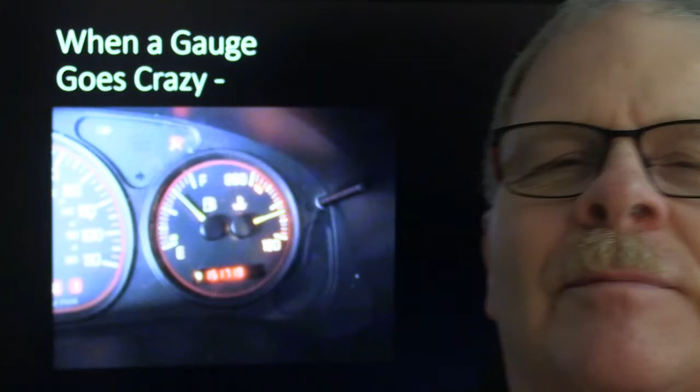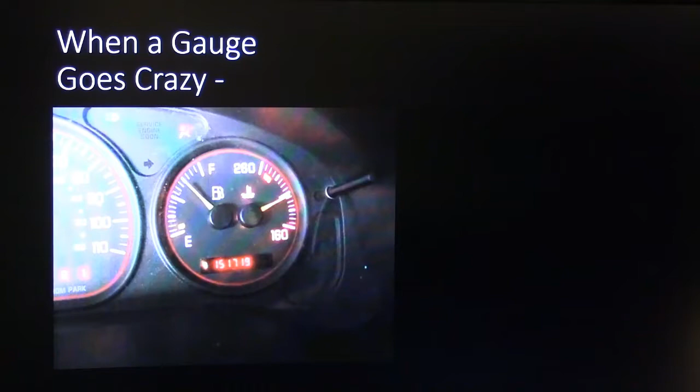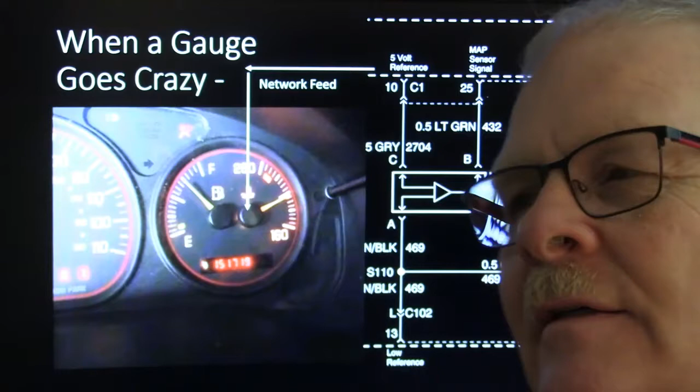Now, this thing right here, tracking this through the Motor Logic to figure out exactly how the signal makes it to that temperature gauge on the instrument cluster, it'll typically be a class 2 signal line on these GM vehicles. The engine coolant temperature sensor is going to be networked over to the instrument cluster typically. Sometimes I think it goes through the body computer or something. I lose track of all that. Whenever you're fooling with one of those, you've got to focus on that particular vehicle and its schematic.

This particular one though, we replaced the engine coolant temperature sensor on the engine and it took care of it. It surprised me that with the readings moving around like they were, it wasn't causing issues with idle quality and other kinds of things. But we put an engine coolant temperature sensor on it and it settled that gauge right on down.

Now on some of your General Motors pickup trucks, between like 2005 and 2014 or whatever, you get those little kits, you can even order them off Amazon, where you replace the little stepper motors that drive those needles, and that is absolutely a fun repair. Doesn't cost a lot to buy the stuff to do it. You have to have a little bit of understanding about it. There's all kinds of YouTube videos where somebody will show you how they did it.

But you have to be something of a hand with a soldering iron, or you can get in trouble. Sometimes you can get different color instrument cluster lights to put in those things. It's cool as all get out, and this is really kind of fun. But this wasn't a problem with the cluster as much as it was with the sensor that was actually at the source of it. Now, this is a little story I wanted to talk about here.

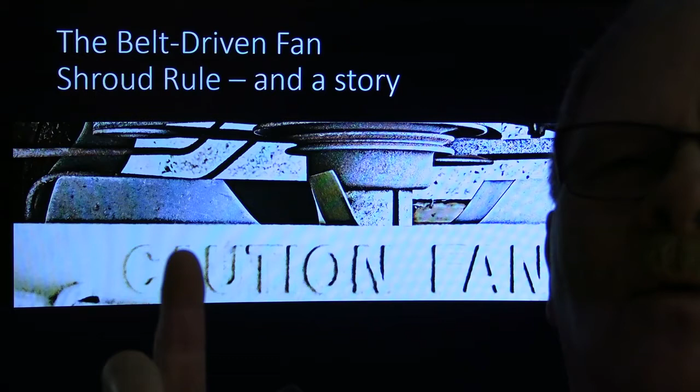You see how that fan is? You see where the fan is split in the middle right there? Let me back up and tell you a little bit about this. There was a late 80s Ranger that belonged to an airline pilot, and this was a long time after that Ranger was new, but he'd driven it for years. He didn't want a really nice vehicle parked at the airport while he was flying his plane, and so he got this old Ranger and he would drive it.

It had a V6 in it, and I can't remember if it was a 3 liter or 4 liter, or what year. Well, it would have been a 2.9, not a 3 liter, in that year model Ranger, because the 2.9s were what was coming in those Rangers back in the 80s. The 2.9 is the same basic engine as the 4.0 overhead valve. The 3 liter is a different engine from the 2.9, and then there was the 2.8 with the carburetors back before they put fuel injection on those Rangers.

But the point is, this one, as I remember, had a 2.9 in it, and it was trying to overheat. We did all kinds of stuff trying to figure out what was making it overheat. We actually measured the temperature at each one of the expansion plugs on the end of the cylinder head to see where the heat was starting to build up. We did water pump stuff, circulation, anything you could possibly imagine. The cooling system was clean, but it kept trying to overheat. And finally, the guy said, is it possible that we could put a bigger radiator in?

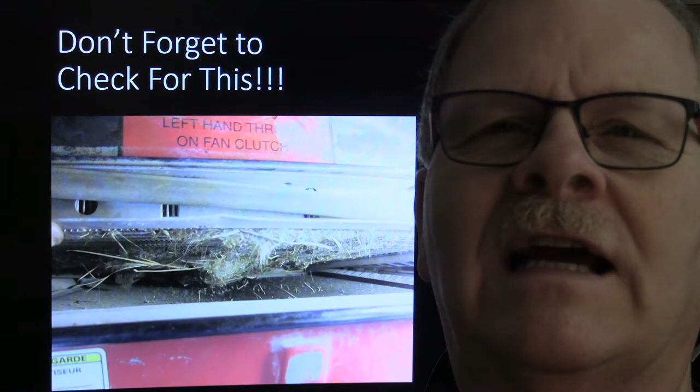All right, don't forget this when you're looking at overheating issues. It's really smart, and I've mentioned this before. You cannot see this unless you take the radiator loose and move it back away from the AC condenser. That stuff will go right through the AC condenser, and not a bit of it will stop there; it gets stopped by the radiator and clogs up in between. I don't know how many times on these farmers' trucks around here I've had one overheating, and I've just externally washed the radiator after cleaning all this trash out and had it cool right on down, just like it was supposed to.

It's amazing how all of that stuff can make it all the way through that AC condenser, and it'll fool you looking at the AC condenser into thinking there's nothing in the radiator. But boy, if you pull that thing back and look down at that radiator, or maybe get your borescope to look down in there, you'll be surprised sometimes how much of that crud is there.

Now, you've also got to think about where the vehicle has been and how they've used it, and if they've done a lot of driving through the fields on it, like the farmers do, chasing their cows and all, you're going to wind up with a situation like that.

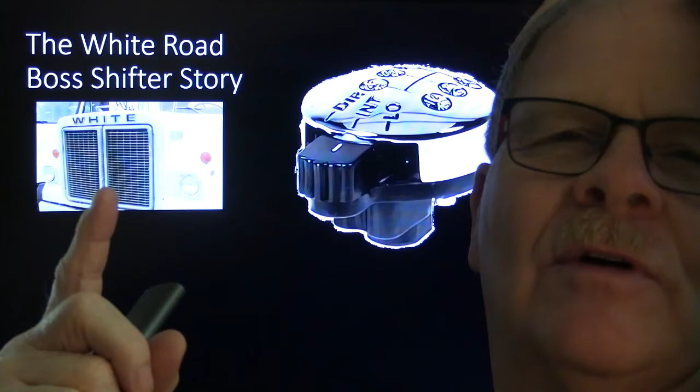All right, this right here was a little White Road Boss story that I had. I mentioned it one time before, but we had a couple of these White Road Boss 2.5 ton, deuce and a half semis down there when I was working in Texas. I was probably 21, 22 years old at the time, but I was something of a shop foreman. I had a purchase order book and that kind of thing.

But all of these older guys were always telling me, you can't do this, you can't do that. Some of these guys were just truck drivers, some were electricians, some were welders and all that kind of stuff. But because I was younger than every one of them, they always felt like they were a little bit wiser. And all they had to do to get me to try to do something was say, you can't do this.

One time, my immediate supervisor was in charge of the cranes and the pipe loaders and the forklifts and the cars and the trucks, and I basically handled the lighter work on the pipe loaders, if you could say there was any light work on them, and also the forklifts and the cars and the trucks. I didn't do any work on the cranes because I didn't like cranes. I've worked on cranes, but I didn't care nothing about fooling with cranes.

This CY60 forklift that we had, an old Clark CY60, had the power steering pump built on the back end of the generator. This one's old enough to have an actual generator, not an alternator. And the seals in that power steering pump kept leaking. Even when we put seals in there, I don't know if the shaft had a little mark on it or was brinelled or something. But oil would get into the generator, and the generator would stop putting out because the oil would foul the brushes.

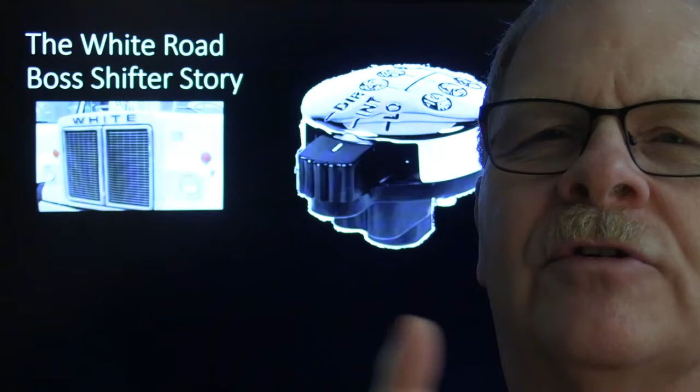Well, anyway, some of these smart aleck truck drivers had a shifter kind of like this with these air valves on it. They got this big, fancy Hurst shifter, a big, ugly, stupid looking thing, and it still had the air valves mounted on it some kind of way, and they wanted to put that on there. But rather than just being right on top of the shift rod, which had a 5/8 thread up in here, they put that big old thing on there, and with all that jerking around, they broke that threaded rod off the top of that shifter.

And so the truck came in and they said, well, this rod broke off the shifter. What are we going to do? I was sitting up in the truck looking at it, and one of them says, you're going to have to replace that shifter. And I says, oh, well, I don't know.

I said, I might be able to fix this one here. They said, there's no way you can fix that shifter there. The threaded part broke off of it. And it was like a 3/4 inch or slightly bigger shift rod, and it had been machined down to that 5/8 U.S. standard coarse thread.

And so I said, what if I was to file this thing off flat where it broke, center punch it, and make a little pilot hole, and go down in there with a drill, and then tap some 5/8 threads in there, and use a piece of threaded rod long enough to where I could actually replace the threaded part on top, so the shifter would screw right back onto it.

They says, you're still going to have to pull the shifter off and do that with the drill press. There's no way you're going to be able to do it in the truck. Well, I was going to show those people, I didn't have anything to lose whatsoever. So I got up in the seat with that 1/2 inch drill, and I center punched that thing really good and solid, and I wrapped my leg around it to hold it still, and I held that big old 1/2 inch drill and drilled down in that thing.

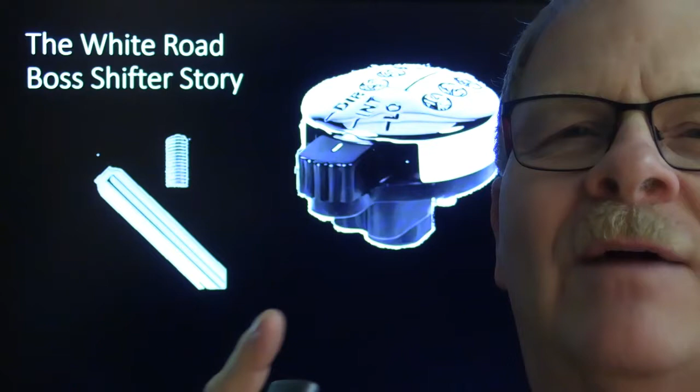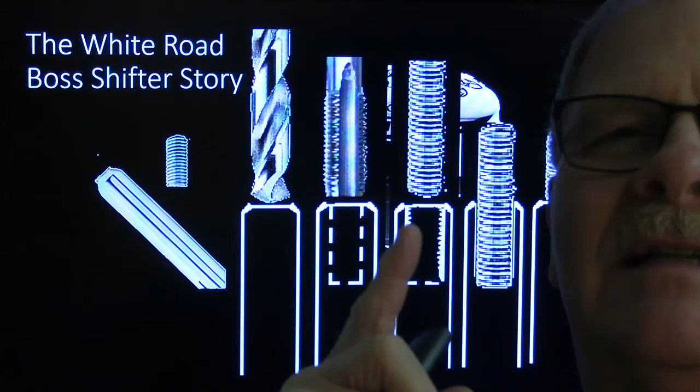And that's how it was broke off like that. And I drilled down in there, and I made that little place right there. And then I got the tap, and I tapped it. I drilled down in there, and then I tapped it with this tap. And then I screwed that piece down in there, and I made that shifter look just like that again. And I fixed that thing.

That truck was back on the road in 25 minutes. They couldn't believe it. They felt like we've got to order parts and all this kind of stuff. And here's the other thing. If you're fixing something in a situation so that it doesn't matter, you know what I'm saying? If it doesn't matter, if you got nothing to lose, that's the point.

One time on one of the big trucks we had a Loadstar 1850 gas burner, and you know how the ring gear on these big manual transmission vehicles is basically you put it on the flywheel kind of like a blacksmith used to put the tire on a wagon wheel. You heat it up and you let it settle into place. In other words, you're going to have the flywheel laying flat. You're going to lay the ring gear up there, and you keep heating it with a torch until it gets big enough to where it drops into place, and then you let it cool off and it grabs the flywheel.

Well, this one here, for some strange reason, had decided to let go of the flywheel, and the starter would spin the ring gear on the flywheel. And so my supervisor said, we're going to have to pull that transmission out of there. And I'd pulled the transmission out a bunch of times, and I wasn't afraid to do that. But I told him, we don't have to pull the transmission out. All we have to do is I can get up under there with a welding machine, and I can basically put about maybe a 1/2 inch weld in about 5 or 6 places around that thing, and it will work just as well.

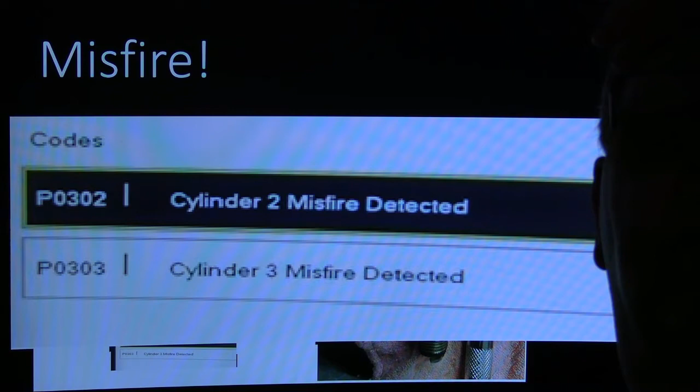Cylinder number 2 misfire detected on this particular one here. This was an Asian car. It may have been a Nissan Maxima. I'm not sure, I absolutely cannot remember. But I got the Pico scope that we had over there at the time, and I went ahead and got this screwball scope pattern. See how crazy that thing looks.

And whenever I was using a plain old scope, back in the CRT scope days, if I saw one like that, I always assumed there was something bad with the spark plug going on. And so we'll pull the plug out. Look at that. We had that thing scorched all the way down the side. When the plugs get where there's too much resistance, that spark's going to look for somewhere else to go. And this one here arced down the side of the plug.

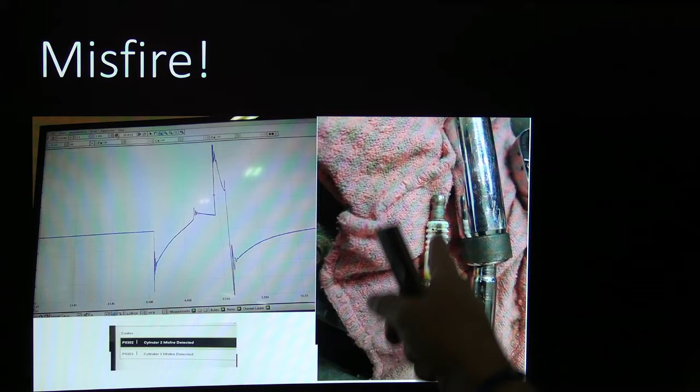And so we managed to take care of that. But there's that Pico scope pattern that I got right there. That was a pretty cool little picture I pulled out of my archives.

You know, if you pulled in there and told them you wanted to buy the truck, they'd just say, no, it ain't for sale. It was my daddy's truck, and I'm going to keep it until it rots or something like that. But I'm not in the mood to do any sort of rebuilding on trucks anyway.

We're basically going to be teaching them how to work on the cars of today. Late 60s vehicles are interesting to work on, but they're not going to benefit a whole lot from that. I like for the students to have something they can learn more from than working on something that's old. Later on, we did do a little bit of work on some older cars, but I wasn't going to get that started because you can fill your whole lot up with people wanting old cars worked on.

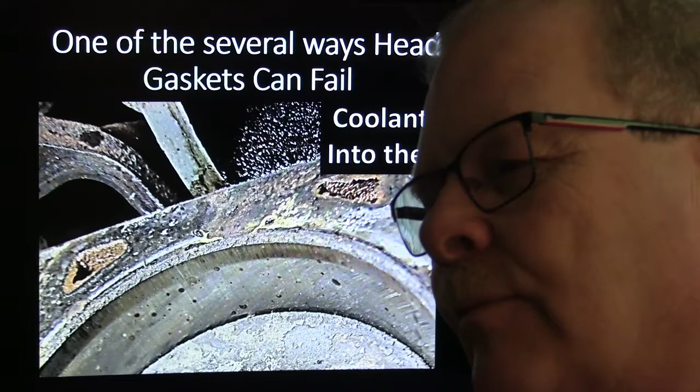Now this right here is one of the several ways head gaskets can fail. This was on my Jeep Cherokee. Whenever I'd drive it 30 miles from where I was teaching, I'd stop here and go to Winn-Dixie to get some bananas, and when I'd come out and crank it up, it would go bup, bup, bup, bup, and flash a check engine light, and then it would clear up.

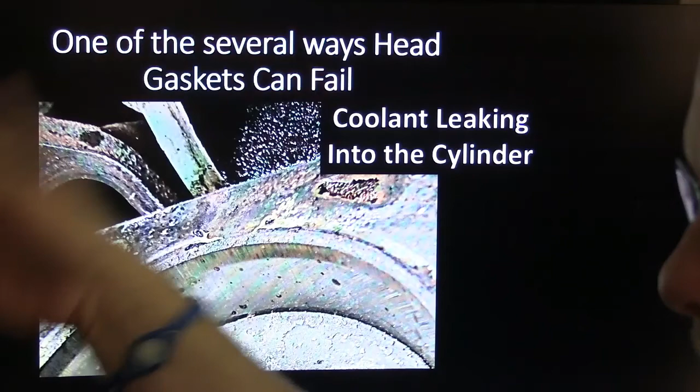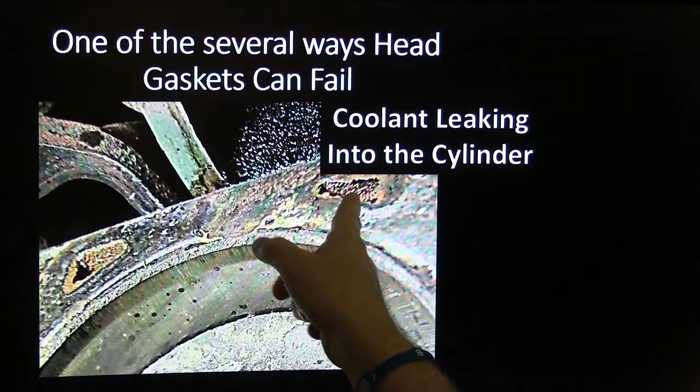And it turned out that cylinder number 3, which is fairly common on those 4-liter Jeeps, was getting coolant. This crusty stuff you see here is coolant that has crusted up and dried on top of the piston. It was basically weeping its way from this coolant passage past the fire ring into the cylinder. Now, again, there was no combustion getting into the coolant, but there was coolant getting into here. And that is more common than you know.

When people talk about blown head gaskets, they say, well, if I got a blown head gasket, I'll have water in the oil. That is so rare. I don't even know on most of them how that could even happen. But in this particular case, that one there caused a misfire. And you know what I told you I do with a misfire?

When I've got a misfire like that, I crank it up, and while it's still skipping, I shut it off. I pull all the plugs out, and if I see one of them that's steaming, I know that there's coolant getting into that cylinder. Or if I see one that's got crusty green deposits on it, the same color as dried antifreeze would be.

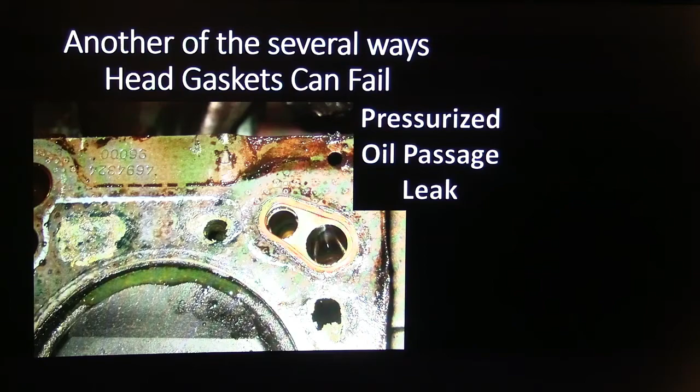All right, here's another way it can leak, a pressurized oil passage. All of the engines that have overhead camshafts in the head have to have pressurized lube oil going to the cam bearings, and they're going to have a pressurized oil passage going through.

This is on a 98 Dodge Stratus. This particular one, the reason that head gasket had to be replaced was because this thing was leaking a lot of oil right in this area. It was running down the bottom, dripping off the bell housing.

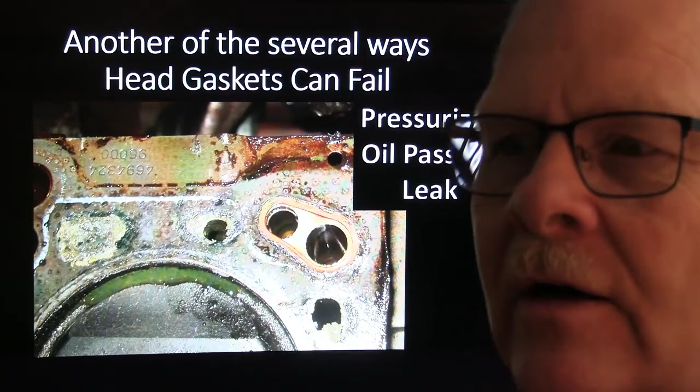They thought at a shop down in Florida somewhere where they took it to that it had a rear main seal because it was dripping off the engine down there at the lowest place where it always will, even if it's leaking above there. We put dye in it and found that. But anyway, this right here was where it was leaking, and that's the oil passage right there.

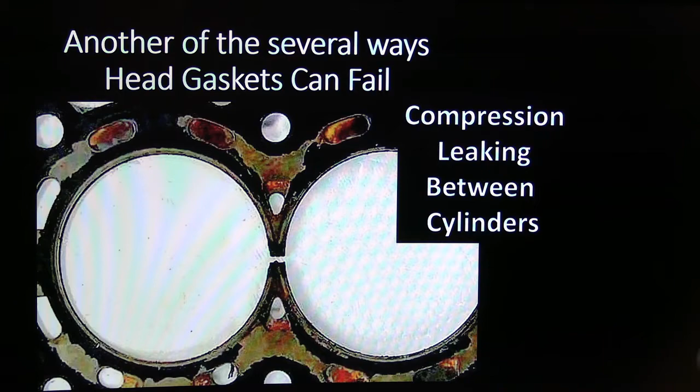Now this one right here is another way it can leak. You can blow between 2 cylinders. You'll have low compression on 2 cylinders. Usually have misfires on 2 cylinders. And you may have some popping going on in the intake or something like that, or in the exhaust. But whenever you measure the compression, you got 2 adjacent cylinders that have low compression.

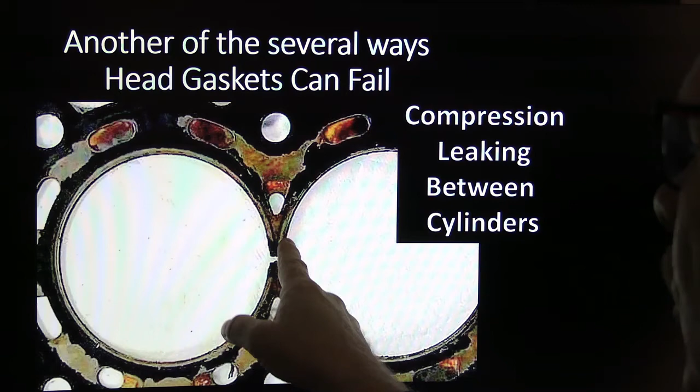You're going to be looking for a situation like this. One fire ring failed, and then it burned through the other one, and all that. The fire ring is the part around that cylinder head gasket that's supposed to contain that combustion whenever it happens. And this right here is when you're getting combustion into the cooling system, and it'll overheat it really, really fast.

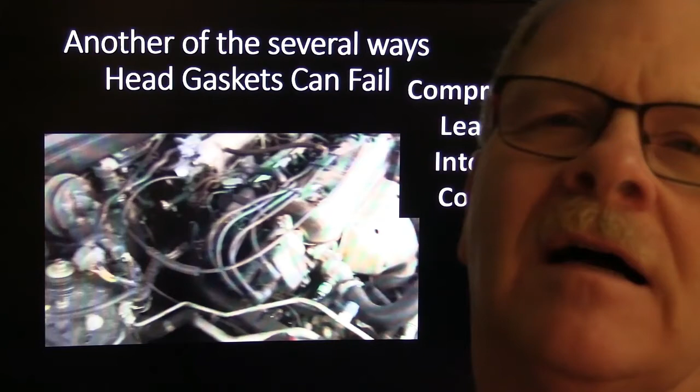I had often told my students that if you suspect a problem like this, that was pretty doggone bad there, the one that you saw puffing. But if you suspect that you may have a problem, let the vehicle sit there until it's completely cold, it's been sitting all night or whatever, and then go out there with the radiator cap on it and fire that thing up. There's a couple of ways you can do this. Fire it up, let it run about 60 to 90 seconds, switch it off.

If you take that cap off and you hear it going when you take the cap off, you know it built pressure in there a lot faster than it should. Because the reason pressure builds in your cooling system anyway is the temperature and the coolant expanding and all that. It shouldn't heat that thing up and build pressure in there within 60 to 90 seconds of running on a cold engine that's been sitting all night.

What some guys like to do is take something like a rubber glove, like a nitrile glove, and either tie wrap it or rubber band it right there around the radiator filler neck. And when you start it up, watch that rubber glove, and if you see it puffing, or if you see it inflating really quick right after you start the engine when it was cold before, or even when it wasn't cold, if you see it beginning to inflate really fast, you'll know that there's combustion going in there.

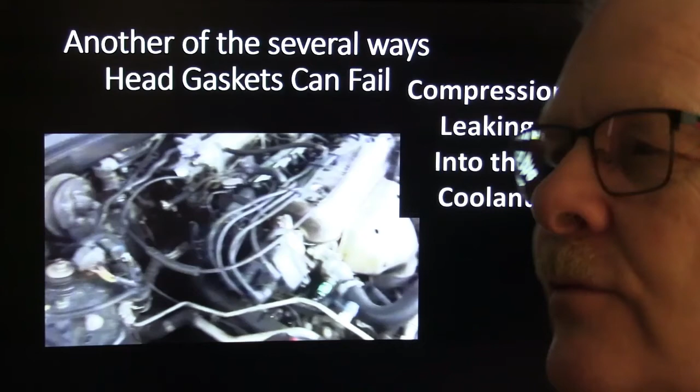There's tools you can buy that you can put this liquid in there and you watch it change color and all that kind of hogwash, or you can get an exhaust gas analyzer and sniff in there and see if you find anything. But anyway, what I always like to do, if I would spin it over like that and I saw it go puff, puff, puff, puff, puff, one puff per cylinder.

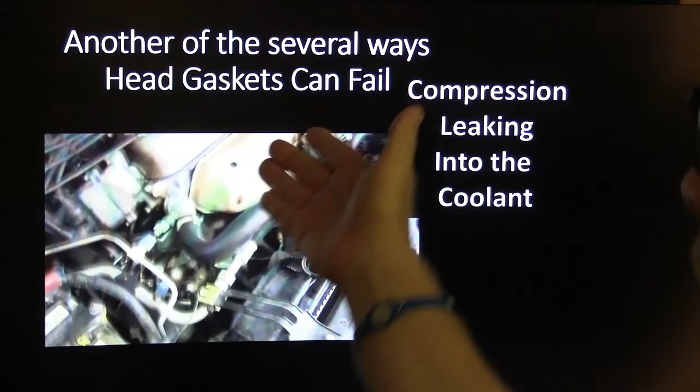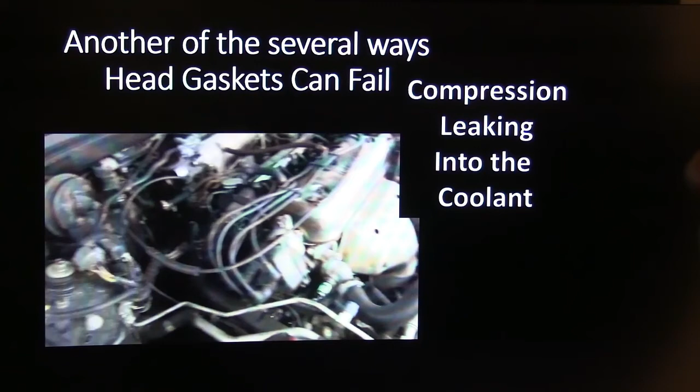Now if you pull the spark plugs one at a time, or pull all but one of them and leave that one in there with it completely full of coolant, you spin it over. If it disturbs the water, you'll know the only one with a spark plug in it is the one that's actually got the breach. Now if you pull that plug out and put it in the next hole and keep working your way down there, you can find which cylinder is causing that before you ever tear it down. Of course, looking at the plug helps too.

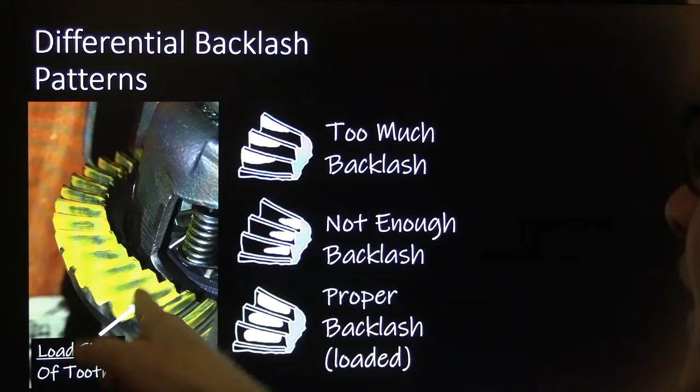This right here is differential backlash patterns. This is the load side of the tooth, and this is what it's supposed to look like. You're going to paint this compound on there, and you're going to turn it through, and you're going to make sure that you're turning it the way so that you'll have good contact on the drive side of the tooth, which is the bellied out side of the tooth, the side that's loaded when you're going forward, okay? This is the load side of the tooth, and this is laying over sideways like these are.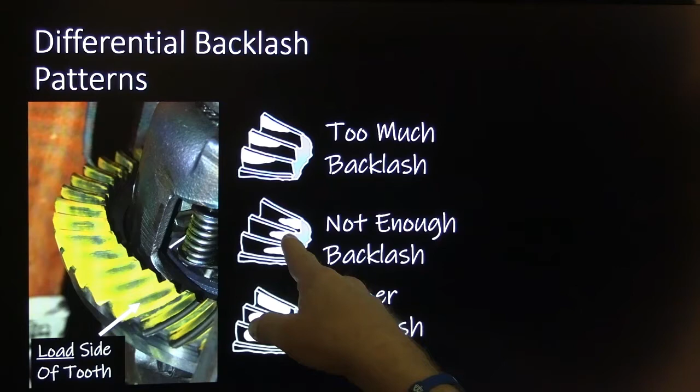Okay, that's the way it's supposed to look if it's set up right. Now if you don't have enough backlash, you're going to see a pattern that's down here like this. If you got too much backlash, you'll see it like that. There's some other ones for pinion depth and this kind of thing. I could have shown you a whole bunch of these patterns. We'll save that for another video.

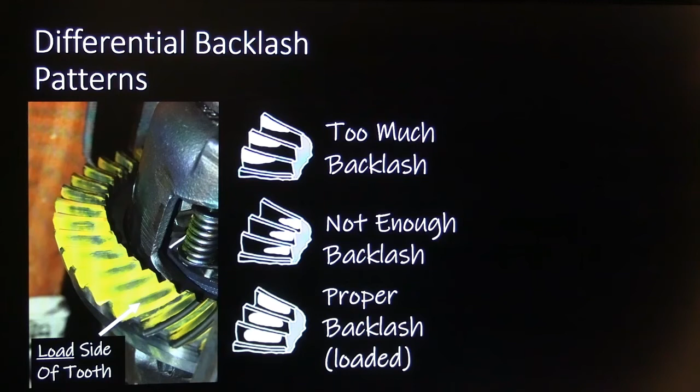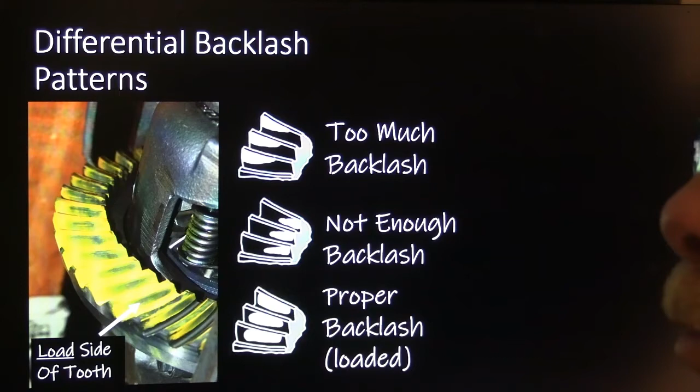This is the proper backlash with the engine heavily loaded. But that's what you're going to see right there. You just paint it basically with some kind of white grease, or maybe just plain old paint, but you got to turn it through if you're using paint so that before the paint gets dry you can see what kind of pattern you had on your gears. And basically if you don't do this, you're going to have singing, whining gears, and if you drive them until it mismatches the gears, they're never going to stop singing and whining.

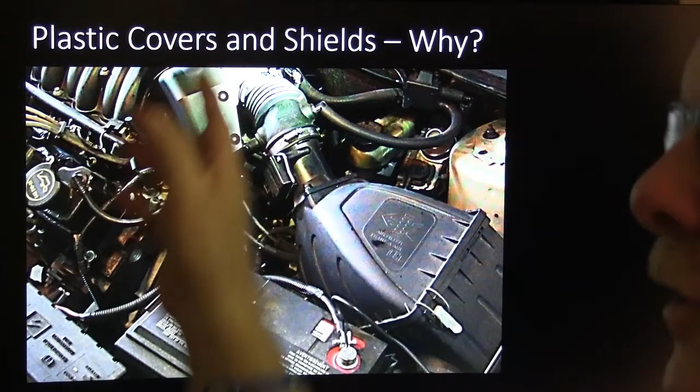Alright, now look at these plastic covers and shields. You got a shield over the throttle. If you're one of these guys like me and it doesn't have electronic throttle body, and you like to pull on that throttle and rev it up, that's annoying because it's hard to get around it without taking it off of there. But they put this cover over there, and then they put a cover on the battery too. Now what the heck is that about?

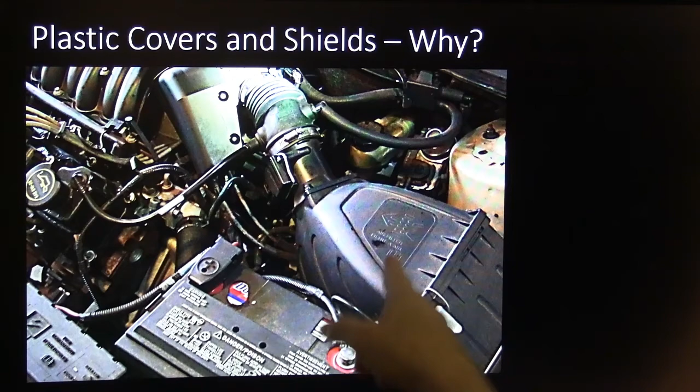Also, you got this breather here. If you see this breather cracked or broke or something like that, don't try to fix it with duct tape. Replace the breather, or you're going to wind up getting a lot of dust and dirt up in here destroying your engine.

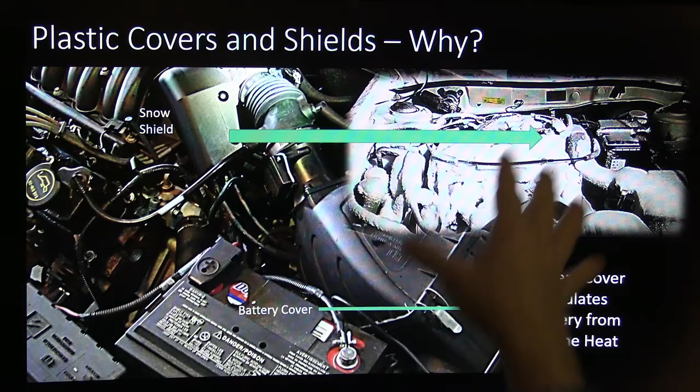Well, this is a snow shield. You would not believe, if you're not from that part of the country, how much snow gets through the grill and under the engine compartment, and if you don't have the snow shield on it, it can hold that throttle open and you can let off the gas and find out you're still driving down the road. PCV system likes to ice up sometimes in places like that. The throttle body sometimes will ice up because of cold moisture coming. That's why a lot of your throttle bodies will have hot water lines circulating through the throttle body to prevent the throttle from sticking open.

The battery cover is to keep the battery from getting quite so hot due to engine heat. Some of the Explorers, whenever they first started building the Ford Explorer, I'm talking about the SUV, not some of the old pickups where they call it Explorer, the SUVs would come in there and we'd have to put battery boxes on them under some sort of a recall program. Part of the problem we were having with the Explorers was that batteries were boiling and making a big mess out of everything.

And so what we would have to do is get those battery covers that they'd send, and we'd put those battery covers on there to prevent the battery from getting too hot and mitigate that boiling electrolyte situation in the battery.

And we had a service manager one time. Some of you guys that are familiar with the Ford thing, they have this OASIS online automotive service information system, and you put your serial number in and it prints out the warranty work that's been done, and any recalls it has on it. And every single ticket that the service writers wrote, they had to run one of these on it and print that out. Recalls and programs are two different things. Programs expire with time and mileage, but recalls are good forever.

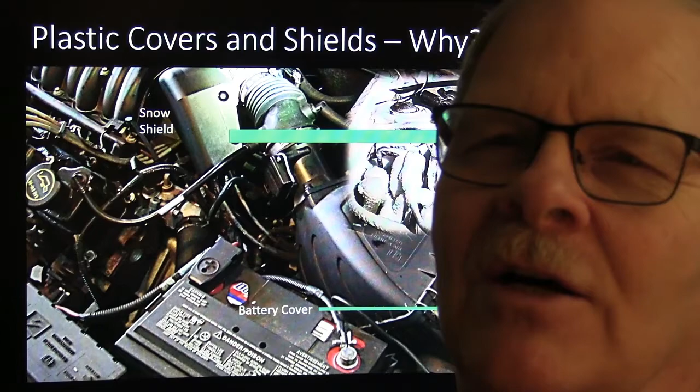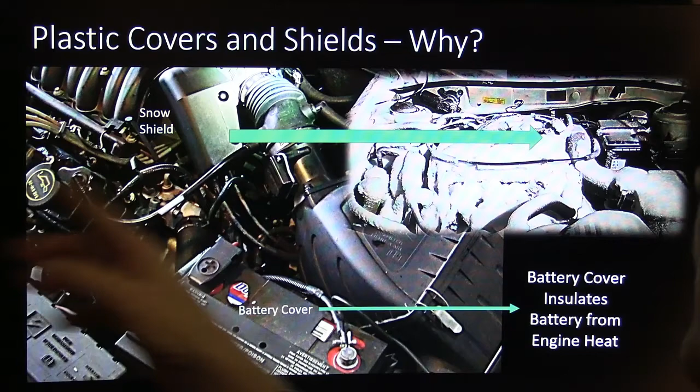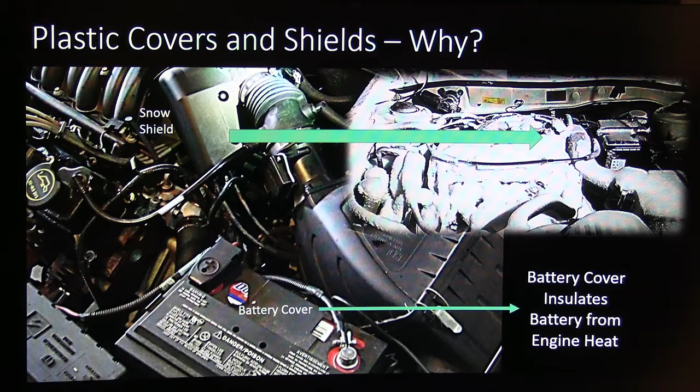Now if you're not going to put it back on there, then you're basically doing something that's going to change it. Imagine this. Imagine you leave it off. They drive it up north. The throttle freezes open, and they crash and burn, and they find out you left the snow shield off. Think about how that's going to play out. Of course, the battery cover needs to be put back on there too. You don't need to leave that off.

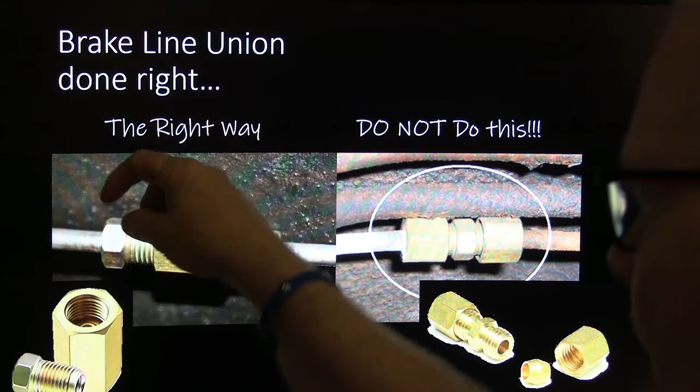Well, the brake line union done right, you'll use one of these, you'll double flare the lines and have the right kind of little nuts here to put it on there. Screw that down in there on both sides. That's the right way to fix a brake line. This is the wrong way to do this. This is a copper tubing union. It's okay for fuel line that doesn't have a lot of pressure on it.

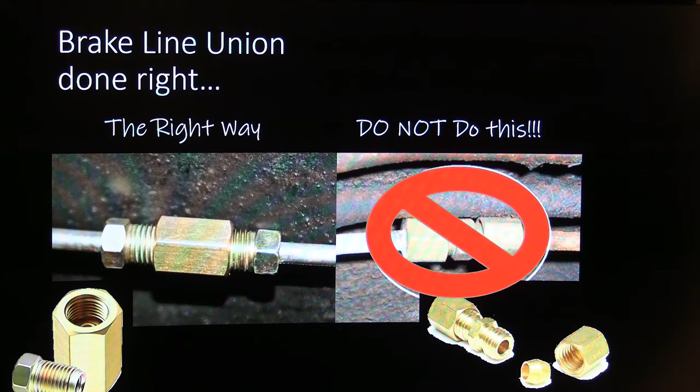These lines are going to have as much as 2,000 pounds of fluid pressure on them, and your brakes totally depend on them things staying there. That's why you need to fix these right. Do not use a copper tubing union on there. You may get away with it a time or two, but sooner or later it's going to bite you. Do not go here. Don't use the copper tubing union with a little ferrule to fix brake lines. As easy as that is, it's a bad idea.

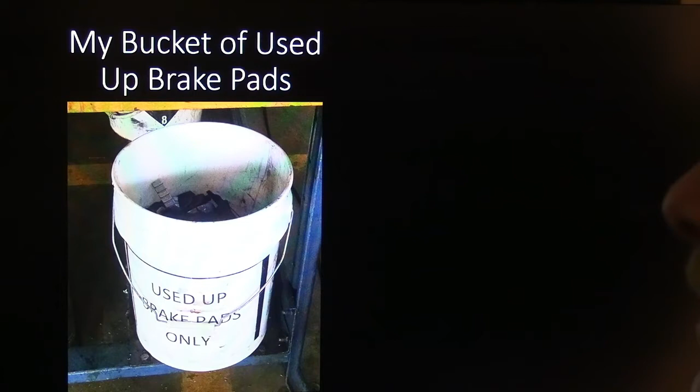I used an old bucket that I put a label on, used up brake pads only, and we would throw brake pads in there. And of course I'd say used up brake pads only. Look here, somebody put some tire weights in there. Whenever you stick them sticky tire weights on there, and then you got to pull them back off when you're trying to get the tire to balance and all. Somebody threw a bunch of those in there. I thought this was like scrap metal.

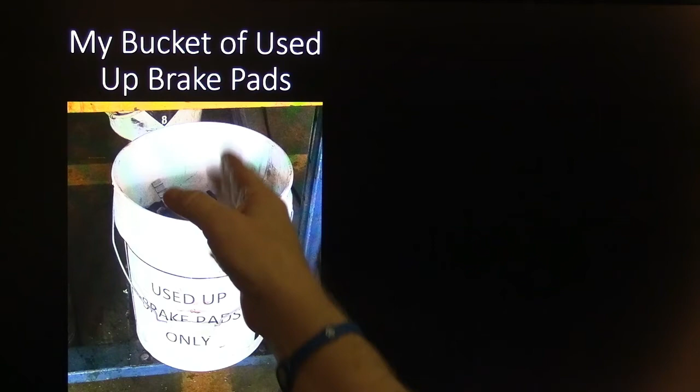And I would actually put these, there was a scrap iron bin over there, and that's where I'd put the brake pads. I didn't just want to throw them in the trash, but that bucket took a while to fill up, but not really all that long if you do a lot of brake jobs.

So it's always a good idea to use fender covers and to keep the thing cleaned up. And some of these vehicles that we used to get in there would be those super shiny Mustangs. And boy, if you put any kind of a little scratch or anything on their paint, some of those people would get apoplectic on you.

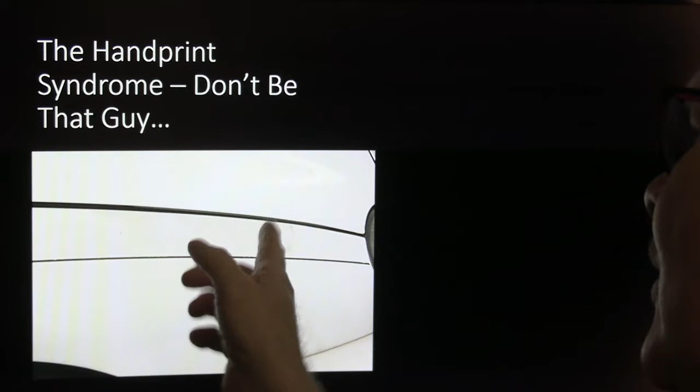But you need to be taking care of that thing and not leave the dirty handprints on there. I took a picture of that because somebody got through with a customer's car, one of the students did, and they left dirty handprints all over it like that.

And I got really tickled at one of these guys that runs a local body shop. He was a piece of work, and kind of loudmouth. Their shop does fairly good body work and all. But I went over one day to talk to him about something. And you know, you can see somebody that's kind of full of themselves like this.

And when I pulled up out there waiting to talk to him, he was out in front, and he was looking at this vehicle he had just finished working on, and he told one of his people that were out there, one of his porters or something, that was supposed to bring the car around and make sure that everything was all right on it.

He was telling that guy, he says, "Get this stuff off of the fender over here. We're not going to treat our customers like that. You know how I am." And I was thinking, you know how I am? Really? You know, he was making it all about him. But this is when you got to take a picture.

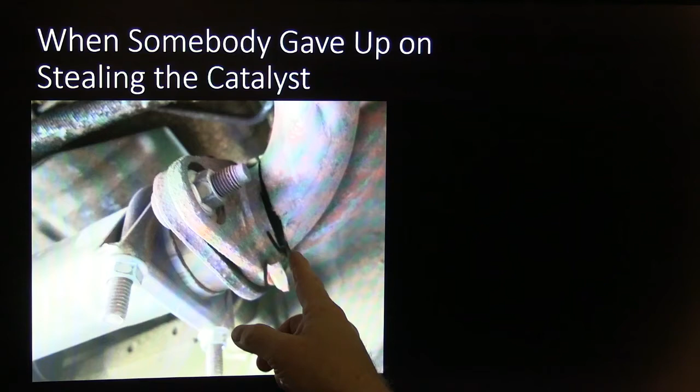It seemed like, as I remember, we basically fixed that with a coat hanger torch. You know, welded it up like that and stopped up that leak and all. But one way or another, that was a nasty business right there when they whacked that thing off.

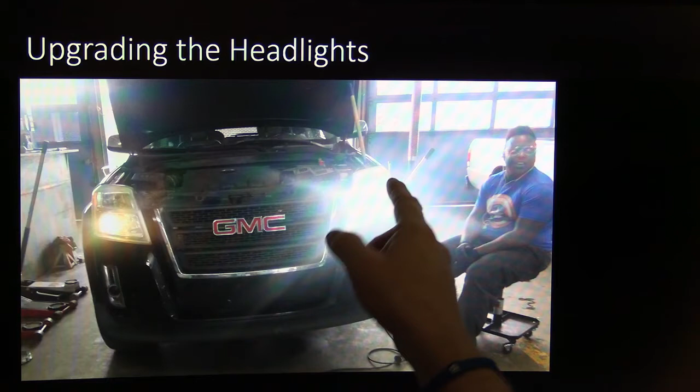This right here was a headlight upgrade. I don't even remember what kind of lights we were putting in there, but when we changed out this light, we turned it on and compared it to that one. Man, there was no difference. This one here was a different kind of bulb. I think it's one of them fancy brighter bulbs that makes you so irritated when you meet one at night going along there.

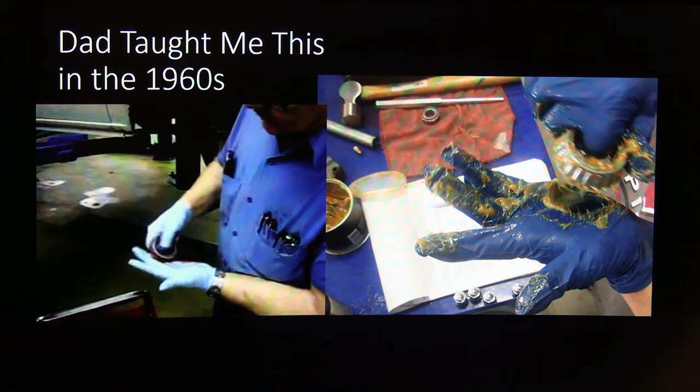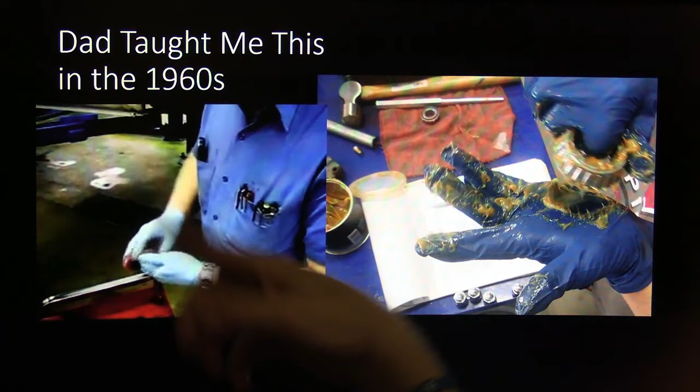Now, one of the things that I thought was very interesting was back in that place where I'm putting that grease down in there. Back whenever I was working at the Mazda dealer, we would do these 30,000 mile services on these Mazda RX-7s. They had front wheel bearings like these, and we were supposed to pack those front wheel bearings.

And I would pull the rotor off, and get the bearings laid out on a rag here, and there would be so much grease packed down in here between the bearings. I'm telling you, it was like a huge handful of the grease that they packed in the factory, and they just packed so much of it in there. I guess they felt like if the bearings heated up, the grease would run in there and help grease those bearings again. I don't know.

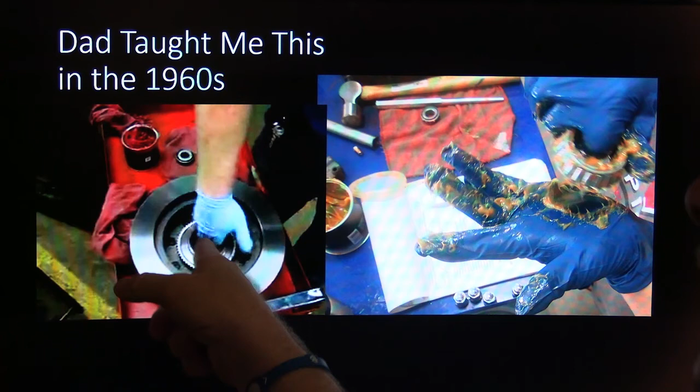But that grease was brand new and had never been touched on those Mazda RX-7s. There was enough of that brand new grease that I could scoop it out of there with my hands and actually repack the bearings with the grease that came with the car when it was brand new. It was just totally astonishing how much grease they would pack between the inner and outer bearings on those RX-7s. I was replacing the rotor on that one right there. And this is the red grease, that's the brown grease, whatever you like to use.

Now this right here was on my Explorer. I put the radiator in it because it started leaking, several years ago. And I kept having problems with this transmission fluid leaking around here. Look at that distorted O-ring. Somehow the O-ring got cut. And it was difficult to figure out why it was leaking. And it's also difficult to replace that doggone O-ring too, because you've got to dig around up in that hole, you've got to get one exactly the right size, and you've got to work it back in there.

From Advance Auto Parts, I wound up going through 2 radiators, and they leaked coolant, even though I finally got this straightened out. So I wound up having to go back and I finally put a Ford radiator on that thing, and it's not leaking right now, so that should be okay.

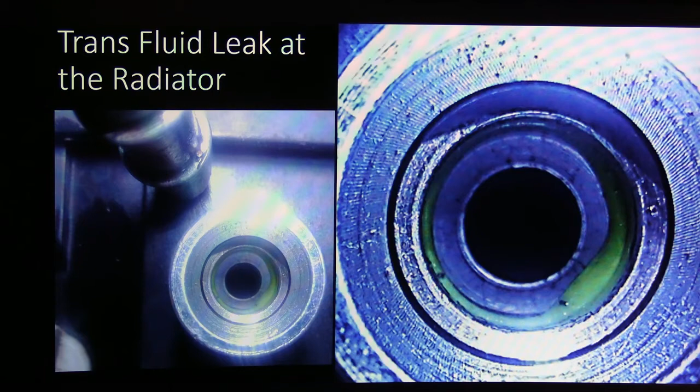Now, when the radiator cap fails, I used to see these. You pull the radiator cap off. If that's dangling right there, then that means air is going to just come and go as it pleases. Or actually, the coolant, when it expands and contracts, it'll be like you don't even have a radiator cap on it. This is actually supposed to seal.

It's got a spring, you notice right here, that's this piece right here. It's supposed to seal, and whenever the coolant contracts and goes down, it's supposed to pull whatever coolant's in the surge tank out of that little drinking straw hose that's underneath the coolant. It's supposed to pull that back in there and make sure that the coolant level always stays up. But that little thing right there, if you pull it off and it's dangling, I see that as a bad cap.

Well, the problem I had was some of the Stant radiator caps I would get from the parts store, on the card before you even pulled them off, would have a dangly valve like that. And I'd say, I don't want one with a dangly valve. That's why I'm replacing the one I got on here right here. So I would say, send me another one. They would send me another one that was exactly the same part number, and the valve wouldn't be dangling on that one. It would dangle on some of them, and some of them it wouldn't.

And the tale that I was told by the parts guy that called the Stant representative, the guy says, well, we build our caps like that with the dangly when it's brand new to prevent pressure from building up too fast and busting hoses. And I thought, that doesn't even make any sense. If any of you guys are familiar with a situation like that, I wish you'd educate me on that, because I'm having a little bit of an issue.

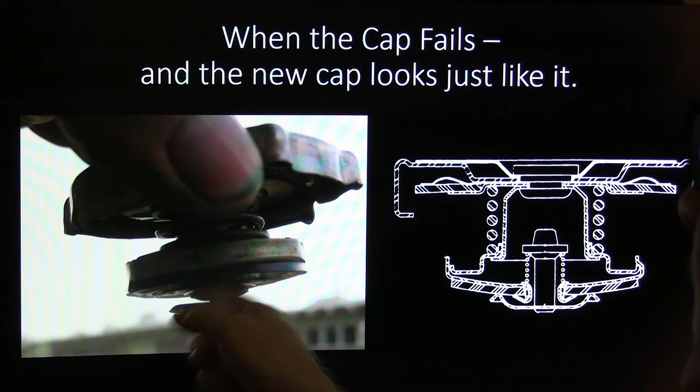And I was frequently telling them that I did not like having one with a dangly. When I get it off the card brand new or out of the box, I don't want a dangly end on it like that, because that spring right there is supposed to hold that up. And it's a weak spring. You can grab this thing and pull it real easy, but I'm always looking at that. It better not dangle whenever I'm looking at that cap.